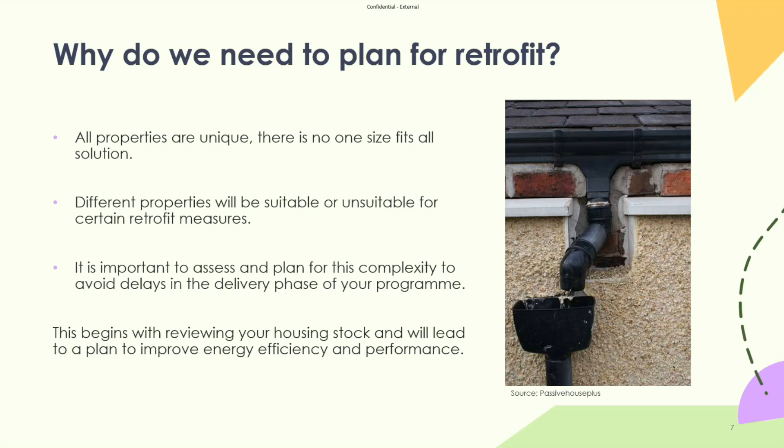Retrofit key principles. So many of you would be quite familiar with the fabric first approach. So as the name suggests, it's looking to tackle the fabric of the building or the structure in the first instance. So these could be the likes of upgrading wall insulation, so whether that's EWI, external wall insulation, or CWI, cavity wall insulation. So getting a better thermal envelope on that front. And the other two aspects of what's exposed is your roof and floor, so insulation in those two areas, loft insulation or actual roof insulation, and then underfloor insulation, which can be more tricky.

And then there's obviously upgrading doors and windows, because that's also part of your fabric first approach, and trying to seal off any gaps that occur there. One thing to always keep in mind is that when you go for that fabric first approach and you make your building more airtight, you need to also consider the ventilation need that comes along with it.

Then the second part that's quite important is the whole house approach, and considering how you tackle the whole property and not just one element. So yeah, this is not always the easiest thing to do because the costs escalate, but trying to have a whole house approach of how you're going to go about it, or at least tackling elements that are related to each other. So if you are doing EWI, you do doors and windows at the same time because those elements interact with each other.

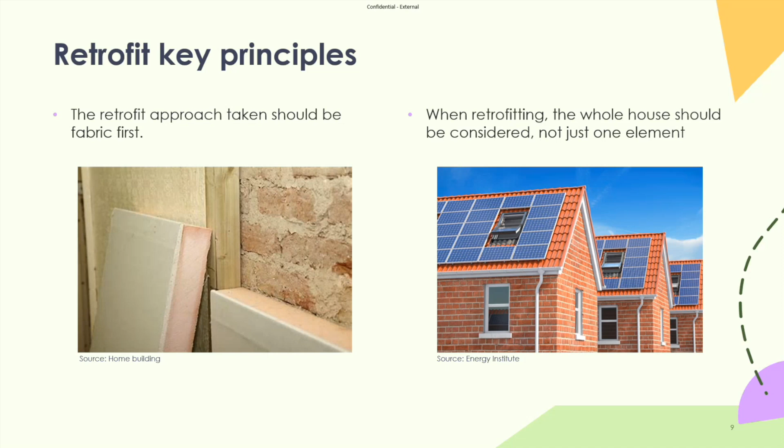So yeah, step one, as we mentioned on the fabric first approach, is about reducing heat loss. So typical interventions for cutting heat loss that occurs through the fabric are around the walls, so insulation on the walls, and as we can see, generally about 35% of heat loss occurs through uninsulated walls, and that's what makes up the largest area of any building. So if we're able to tackle that, that goes a long way in reducing heat loss and making a more thermally efficient envelope for the building.

The same goes for the roof. 25% of heat tends to be lost through uninsulated roofs. So having loft insulation installed, or if it's a pitched roof, you can have insulation installed on the pitched roof itself. And that obviously determines whether you want to have a cold loft space or not. And then there's certain aspects to take into account. Insulating doors and windows: 10% to 15% of heat gets lost through those elements.

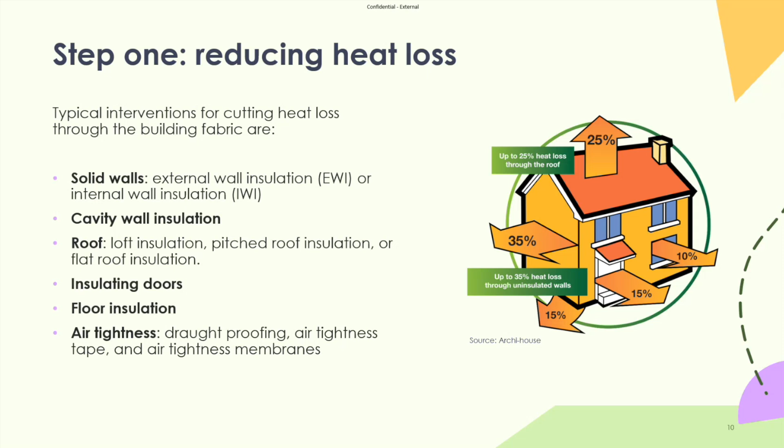And then, yeah, overall air tightness is quite important. So draught proofing, installing air tightness tape around windows and doors, and any air tightness membrane, especially around joints where you have your roofs and walls intersecting and so on.

Step 2 of the process is then to decarbonize both your heating and your hot water supply. So once you've managed to reduce the demand of heat in the building through the fabric first approach, you get to a place where the heating requirement for the building is reduced substantially. And this provides you with a better option of then going to a low carbon heating source instead of having installed a low carbon heating source that's aligned to what your current heating demand is. Because once you do undertake some fabric improvements, your reduced demand means you could end up with an oversized plant or heat pump, where you could have saved costs by installing a smaller unit.

So yeah, evaluating the options for low carbon heating. This could be the likes of installing a heat pump, as we can see in the picture on the top of the slide. That's the external element of the heat pump. So something to be considered is, where does this go? Is there space for the element, and is there any planning or conservation aspects around it?

Connecting to a low carbon network. These are slowly starting to become more and more prevalent in the UK, and there are elements within the guidance that speak to this. So it's always good to have discussions with your local councils and anyone in that region that would be undertaking work around a low carbon network, understanding the timelines of that coming on board, and if there's any upgrades that you can plan for to coincide with such.

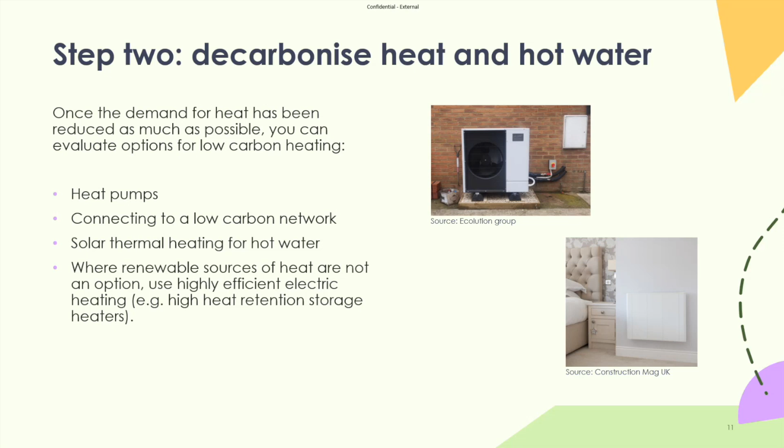It's always also important to make sure that any measures that are installed under these schemes are TrustMark accredited, and the installers have the necessary certifications.

Moving on to stock analysis quickly. So this step is all about understanding your housing stock and how this goes into your plans for retrofitting and understanding the cost caps. So knowing what construction type all your buildings are, knowing where they're located, the condition that they're in, when certain things are to be replaced on them, and how that ties into any plans that you have for energy efficiency retrofit. So for instance, do you have to replace the roof in a certain year? If you are going to be doing that, that's probably the best time to do the other works.

You're going to have scaffolding up, you can do the EWI, you can put in the new roof, and while you're putting in that new roof, you can install the necessary roof insulation and so on, because you wouldn't want to have installed roof insulation into a bad roof that might be leaking. That insulation will just get damaged, and in time when you actually get to replacing that roof, you have to replace the insulation again.

Knowing the current energy efficiency levels, the EPC ratings basically of properties, allows you to then target which ones to go for first. Knowing the residents, do you have vulnerable residents in certain areas? Are there certain times of the year or certain dates that don't work for certain residents? Are there families where undertaking works over the summer break when kids are at home could be difficult? So planning all of that into the interventions that you're going to do and your project plan is quite important.

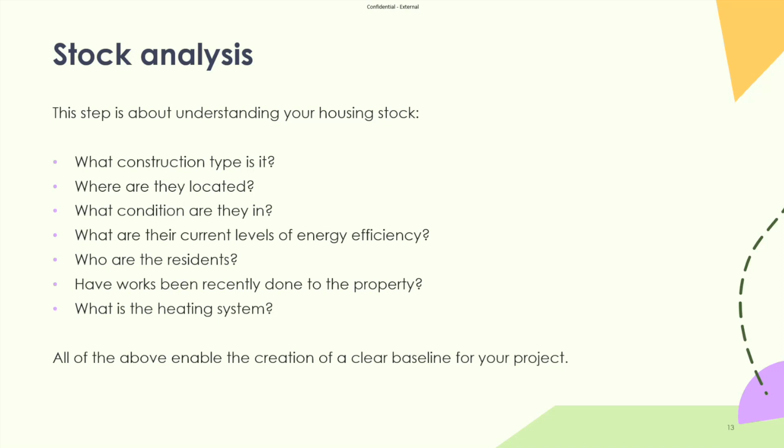So that gives you a quick idea of which ones to target, and those can then be linked to an EPC. So you'd know how many EPC D and below properties you have that are solid brick. So you understand, okay, likelihood is we can probably go for EWI on a lot of these properties as a first instance, and make that part of your planning solution.

Geospatial and investment scenarios, understanding the spend profile of how much you need to spend and where, and the geographical areas also helps in your planning, especially if you have more than one contractor. You could have them focused in different areas, or you can try and focus on an area where you have a lot of properties first and then try and do the more difficult or pepper-potted locations, or do it the other way around, focus on the pepper-potted first, and then towards the end you can then focus on a specific area and just push it all out.

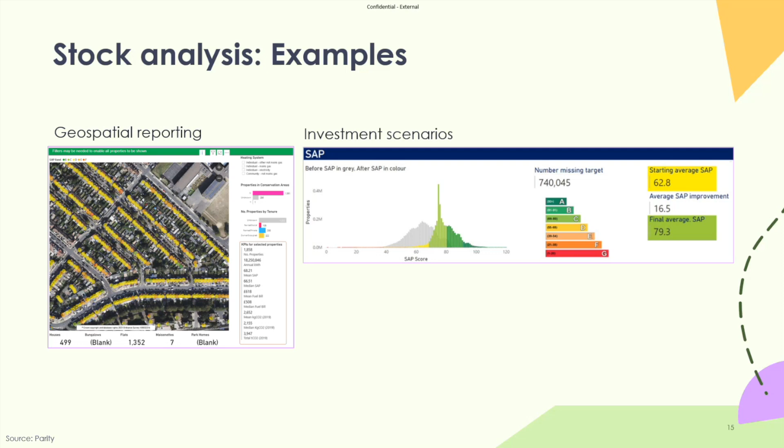It all depends on the relationship with the contractor and how well the contractor knows the area and how mature you are in delivery, which method you would want to go for.

So just in terms of cost cap considerations, for Warm Homes Social Housing Fund, there's a base cost cap, which is a maximum of £7,500 in terms of the energy efficiency upgrades. And then there's also a minimum co-funding requirement, which needs to then match up that maximum 7.5. So basically per home, what you would have is 15,000.

For off gas grid low carbon heating, there is an additional 7.5 in terms of grant funding. So that's to upgrade off gas grid properties to low carbon solutions. Then there are properties that are on gas grid, which you would be looking to move off the gas grid and onto low carbon heating. So this is a bit more nuanced, and it's only up to 10% of the homes in the application that can be considered for this.

And for that, there's a 20,000 allowance per property, but this is not in addition to the base 7.5 thousand. It's just a standalone 20,000, and for this there's no minimum co-funding requirement.

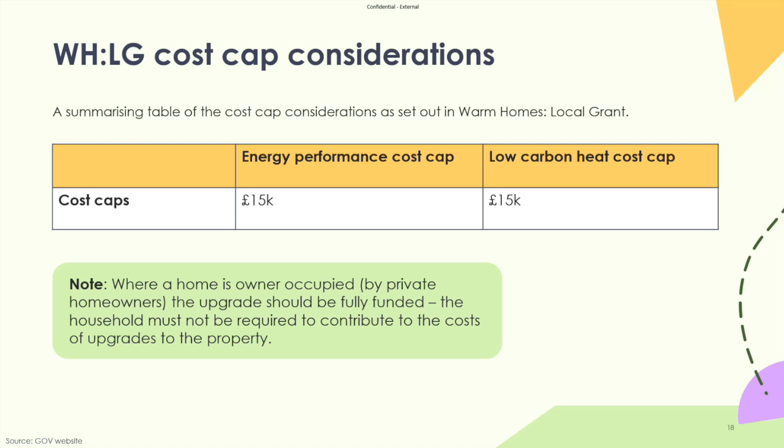So just looking at this in a little bit more detail for the private rented sector and the eligibility. Where there is a landlord that has multiple properties within the local area and satisfies all the eligibility requirements, for their first property there's no requirement for the landlord to contribute for any upgrades, and the cost caps are as mentioned before, so the total of 30,000 spread equally to energy efficiency and low carbon heating.

In terms of a second property, the maximum grant funding in that instance is 15,000 in total, split equally, 7.5 for low carbon heating and energy efficiency. And in that instance, there is a required contribution from the landlord of match funding. We've pretty much covered this, but the maximum required social housing landlord contribution is then to match up with what the grant funding is.

So just back onto the planning retrofit interventions aspect and deciding target outcomes. What is useful to be aware of when you're going about this is once you have some stock analysis that's taken place, it's time to decide what are the outcomes of the retrofit project that you're after. This typically is around achieving EPC Cs by a certain date.

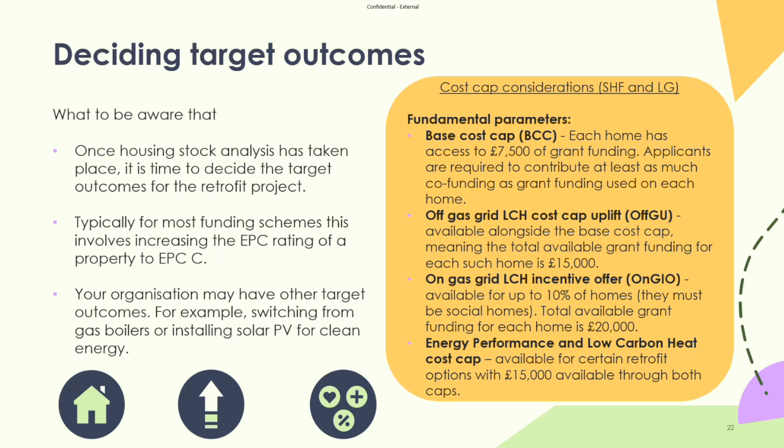Then there's obviously the uplift for off-gas homes. So alongside the base cost cap, the 7,500, taking the total funding to 15,000 in terms of upgrades of low carbon heat. And then when it's on gas grid, if you're going to use that 10% threshold to try and then move those homes totally off the gas grid, where there's no co-funding requirement.

Identifying target properties. So this ties in with the previous section that we've just mentioned of knowing what it is that you want to do with your stock overall, and identifying what type of properties exist. So knowing the different archetypes, is there almost a little bit of a generic solution that you can use for a certain type of archetype in your planning, knowing, okay, for this type of property, we have X amount of them, and generally we will spend this amount of money, and these are the 2, 3, 5 measures that are generally suitable to that property.

And that allows you to then plan and target how you will go about the properties, because you also have a view of what timeframes you can work to, how long it will take to go through the properties. And also sometimes useful if you haven't worked through such a retrofit scheme before, to try and see if there's a way of having discussions with potential contractors to understand from their view what they believe their capabilities are in helping you deliver, or if you have delivered before and you do have an established relationship with your contractor, they would most likely be quite happy to share some insight into helping you plan with the timelines and so on.

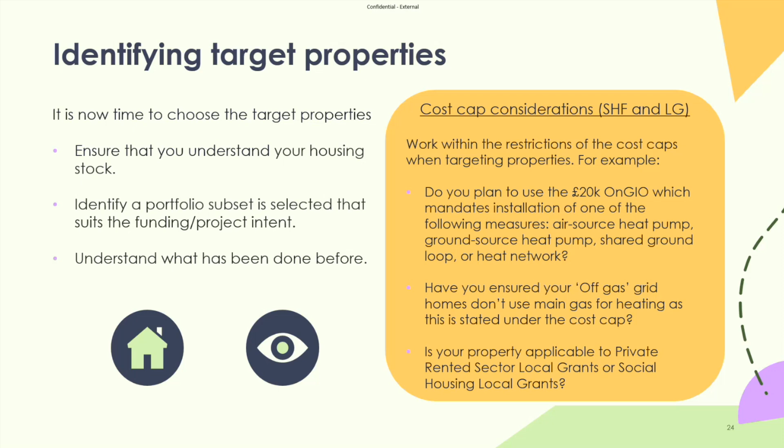In terms of preliminary design, it's always very important, once you've defined your target outcomes, to select a set of properties for the project. Next step would be to think about a general approach to maybe software modeling for that preliminary design. So this could include compiling all the existing data, assembling the right team in terms of designers, retrofit coordinators, and so on. And then also considering the ease of access, and this is especially in relation to the properties themselves.

So this could mean that you might have within your assets team, they undertake condition surveys of your stock anyway. And in that, is there a benefit to maybe upskilling those individuals to be able to undertake some retrofit assessments as well? So when they are accessing the property, they can do the condition survey as well as the retrofit assessment. So you're kind of having a single access to the property, not needing to go in multiple times, especially where it might be difficult to get access to properties. So yeah, understanding and planning for that, or seeing where you might have rejection in getting into properties or access issues, is quite important in the preliminary design phase.

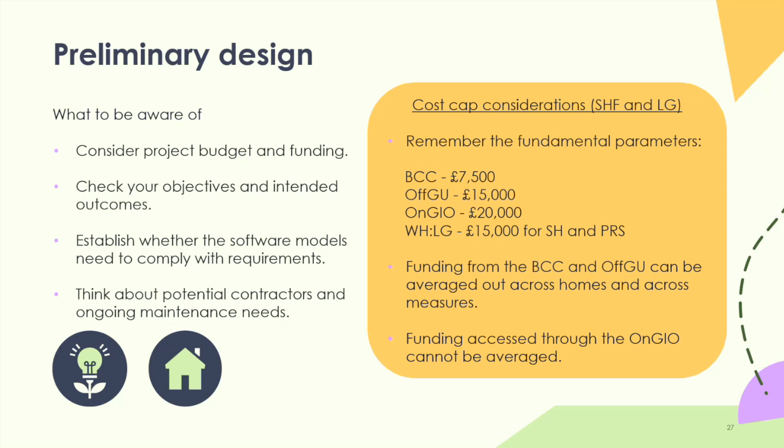A small example could be in terms of EWI, for instance, if you're undertaking that type of work, ensuring that through the process, the residents know that, oh yes, once this is done, they can't simply just drill into the EWI and put up their post box again or their flower basket. There's certain aspects that they need to go through, and that's all managed so that you don't then need to go back and rectify that.

The risk assessment element. So, just looking at that aspect. In terms of the assessment portion, the assessment risks that you could have: potentially having the wrong assessor undertaking the work, or an assessor that's not looking at all the information that's available, so understanding the competencies there. Inaccurate assessment, also linked to that portion, wrong measures.

It could be that they are looking at similar archetypes and not considering that exact property. So sometimes there is a need to have a deeper dive into the property itself to understand if the measures that are being proposed are correct. And then, is it optimistic in terms of the fuel savings that are being calculated?

And the mitigation around this is not always so straightforward, but it's quite important that within your teams, you're upskilling members to go through some of the retrofit training, having a rough idea of, okay, these specific measures, this should be the outcome of it. These are the type of measures that work on these properties and don't work on these types of properties, or this is where we've seen issues before.

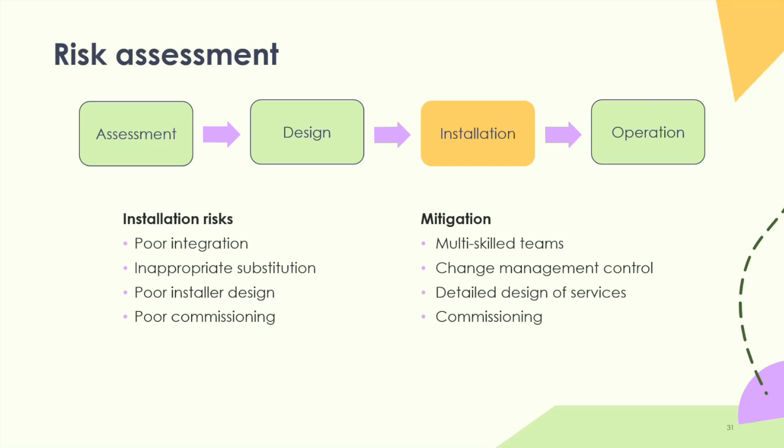And then finally, commissioning, really important, making sure that everything that's been installed is commissioned, working properly, the necessary tests and checks have been done, and that's recorded, and all of that information is then passed on to the relevant people.

And then finally, in the operational stage, operational consequences: if any of this is not done correctly, or there's issues, you can have condensation and mold occurring. You could have controls not used correctly, so you might have installed an air source heat pump and people think, oh, I need to switch this off when I'm not using it. Meanwhile, it's a device that needs to stay on the whole time, and it will put itself into a standby mode if it needs to, and will kick in when it needs to.

But if you're just switching it on like a gas boiler the moment you need hot water, it's not going to work because it needs a lot of time to heat up. So understanding that and showing those type of things to residents is quite useful. Systems being disabled and overridden, similar thing. Users just knowing that they shouldn't change any settings, or what settings they can change, or how that all goes around.

And then just overall poor energy performance. So if the design and installation is not done according to what needs to be done, you're just going to end up with a property that's not performing as designed. So the mitigation, having a handover procedure to the residents and to yourselves to understand what needs to happen.

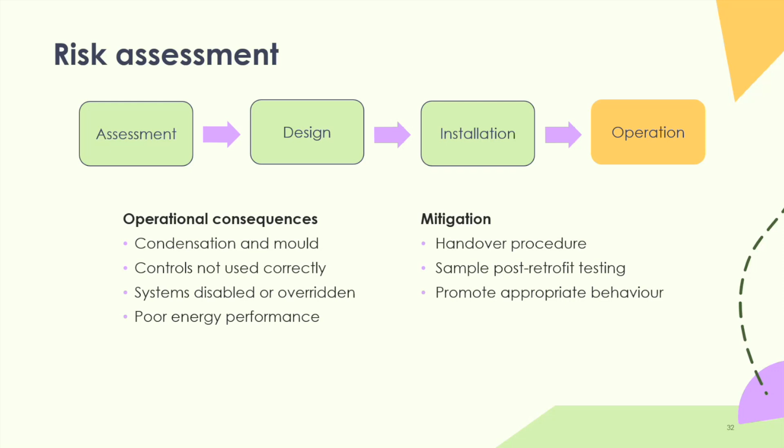Samples of post-retrofit testing to check against design criteria and design objectives. Has this been met? Is the property achieving the required level of heating? Is it comfortable? Are there any instances of damp and mold, and so on? And then just promoting the appropriate behavior within the customers, and also the team that will be in constant communication with them, is quite important overall. And that brings us to the end of the presentation.

In terms of the RISE support, which is the free support that's offered by Turner & Townsend and funded by the department for anyone that's looking to go through the process of applying for any of this funding. There is a self-assessment, which Nikhil would have most likely shared in the chat and will be shared in the emails afterwards. So it's quite important to go through that self-assessment so we can then help identify and develop your project from there and give you the necessary support.